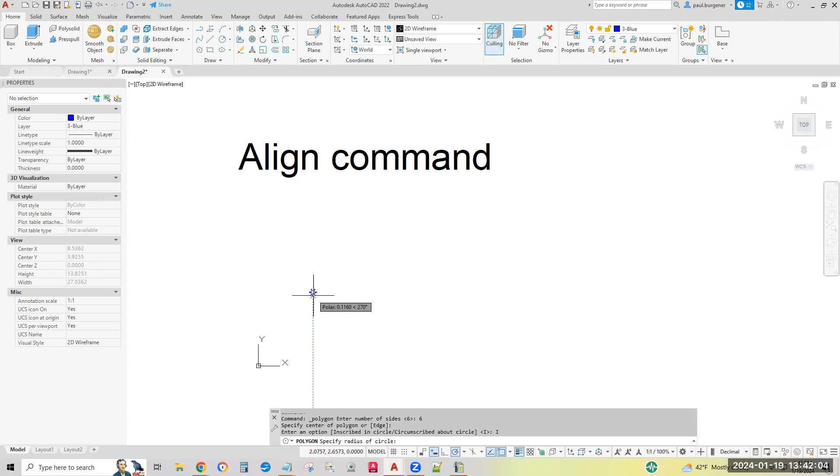Default is 4, but I've been practicing, so I'll make it 6 for a hexagon instead of a square. Pick a point - I'll pick around right about there. Inscribed or circumscribed - inscribed, either one will work. Now the radius, 2, enter.

And I got it on the wrong layer. Always something. Okay, set my current layer back to 0. You'll see why I've got layers in a second. There's my hexagon polygon that's extrudable or press-pullable.

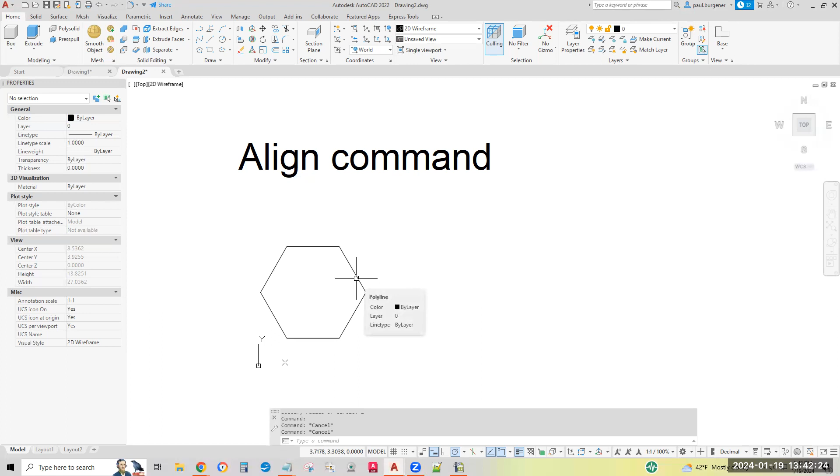Let me rotate a bit to get a kind of southwest isometric-ish view, not perfectly isometric, because I don't want points to line up and look like 6-legged spiders. Hit escape to get out of 3D free orbit. Notice I use 3D free orbit, not orbit - I think free orbit is more powerful, more capable than the old orbit.

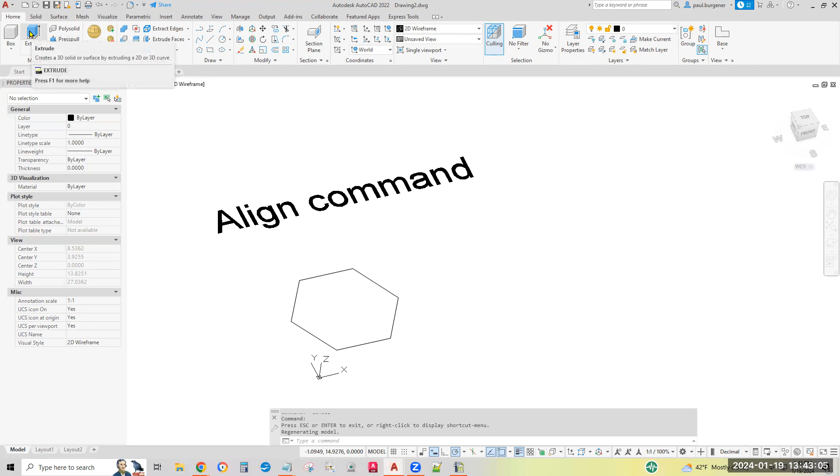Let's extrude this or press pull it. I showed you extrude in class number 2, intermediate AutoCAD. Let's demonstrate press pull. The hard part of press pull is you've got to have a clear shot at the surface you want to lift out or press down. Sometimes that's hard to get a clear shot without any confusion.

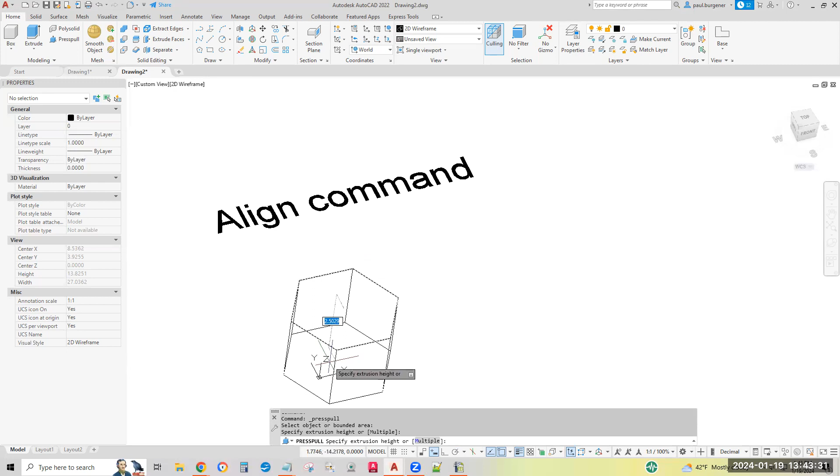This one has no confusion - I'll just click in this open area. Now it says specify the height. You've got to be sure you point in the correct direction. I want to go upward, so I'll go up the Z-axis and type 3, enter. There is my hexagon.

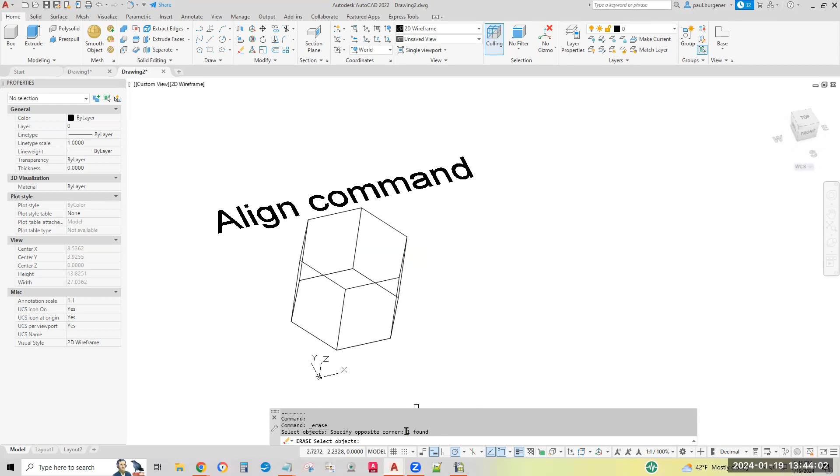Now the original polygon with 6 sides still lives there. I'm going to erase it so it doesn't cause confusion. I'll select it with a regular window. Got it, 1 was found. Enter. Now I'm going to need at least 6 copies of this.

I might make 7 for good measure. And I need 1 to kind of be the pedestal on which I'm going to make my new art sculpture - I'll show you that in a second. It's already made off the screen to the right.

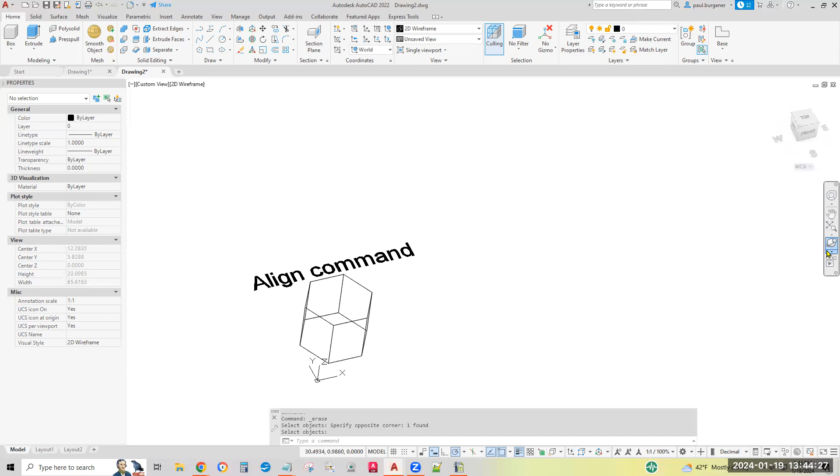So let's make copies of this hexagon. By the way, every point of this hexagon is on the XY plane. There, you rotate the view so you've got X and Y perfectly horizontal. And remember, ID enter - the ID command will tell you the X, Y, and Z coordinates. All these bottom points should be Z equals 0. Very easy to accidentally get things off the XY plane.

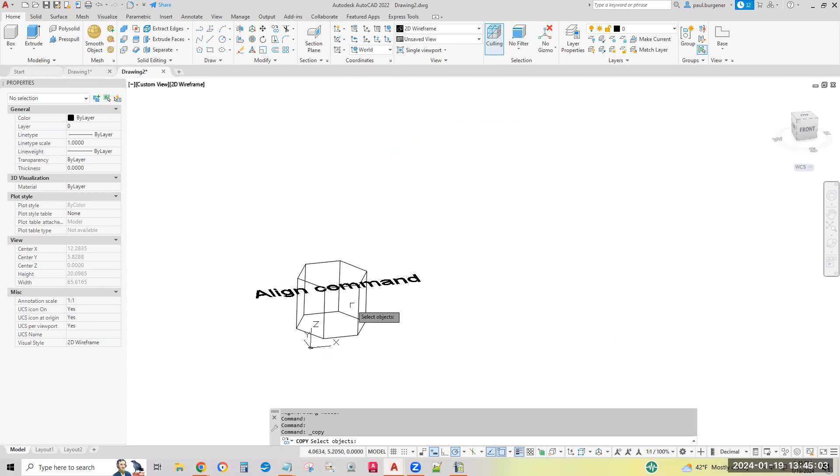So check frequently. Let's make copies of this hexagon. We'll go to copy. I'll select the hexagon, and I'll probably move them several times, but I want to get them so that I've got a clean shot at every endpoint.

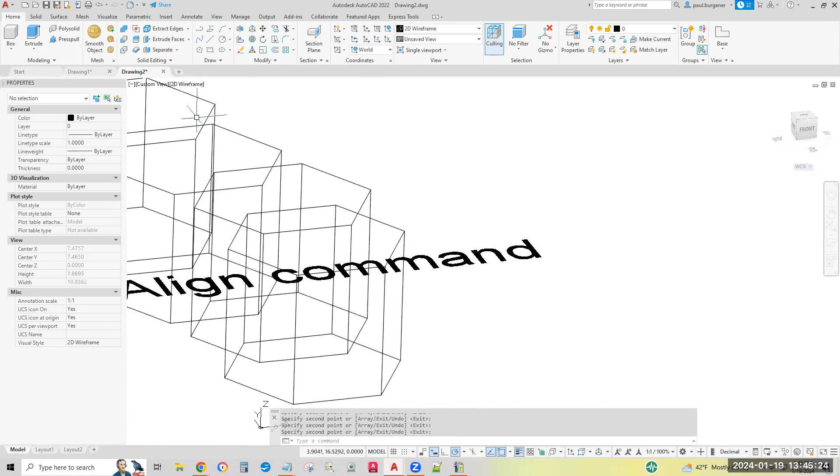There, and I think by zooming in I can home in on every endpoint - maybe not as easily as I wanted. There's the 5. Here's the statue.

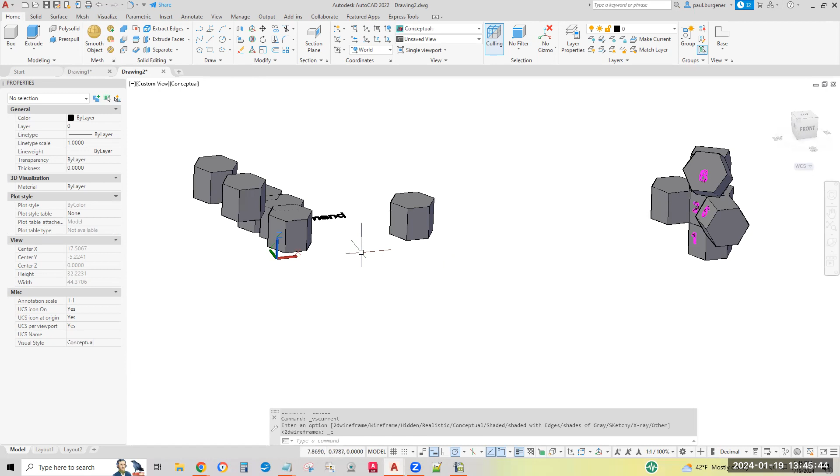Let me make the base for the statue. I'll copy this guy, we'll start it there. Let's go to conceptual. And there's where - why did that go wrong? Let's do a regen.

How did those get moved up? Well, that demonstrates my point. You can easily get things off of the XY coordinate. I'll just draw a line by picking two random points without polar tracking.

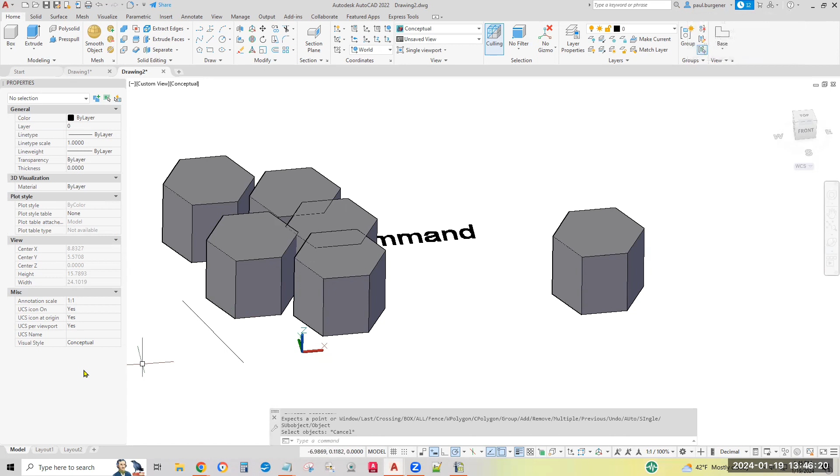I can move, enter for move, these two back down to the Z axis. E for erase, enter. Now let's rotate. And everything's on the Z axis, on the XY plane.

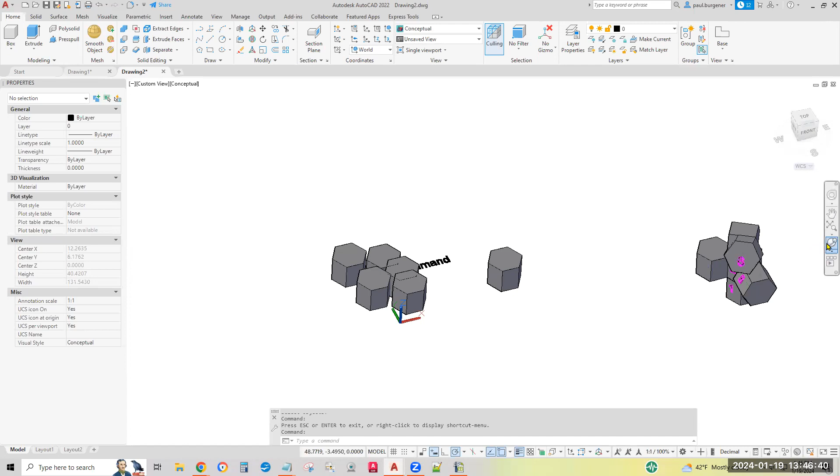I'll slide them around on the XY plane as necessary. This is the art sculpture we're building here. Let me get a better view so you can see all the objects at the same time.

This cube here, this hexagon, is shown in the completed art sculpture as hexagon number 1 at the bottom. We'll place one of these copies on top of it, being hexagon number 2 in the art sculpture. Another copy will hang off the side to be 3, 4 on top, 5 off the side, 6 kind of diagonally.

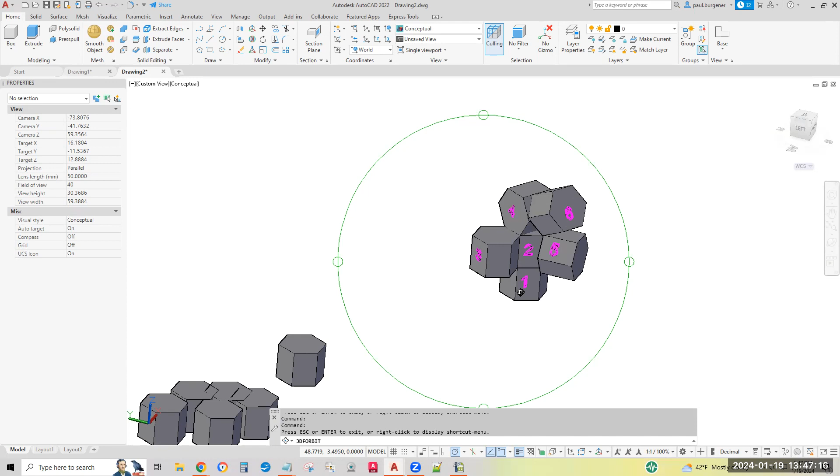So we're going to make this art sculpture, if you will, by aligning copies of the icon of the hexagon on top of that base I just drew. Let's zoom in.

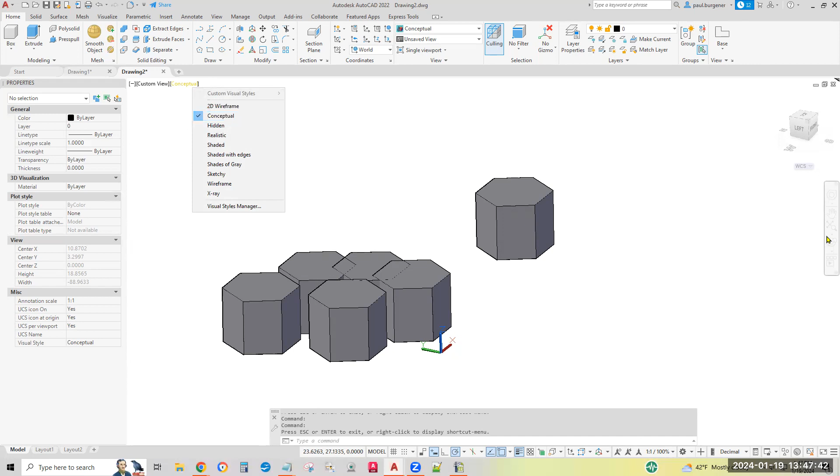Escape to lose 3D free viewing. I don't recommend orbit, or 3D free orbit, I should be saying. Let's go back to wireframe. I prefer free orbit instead of orbit. Unfortunately, orbit is the first on the flyout.

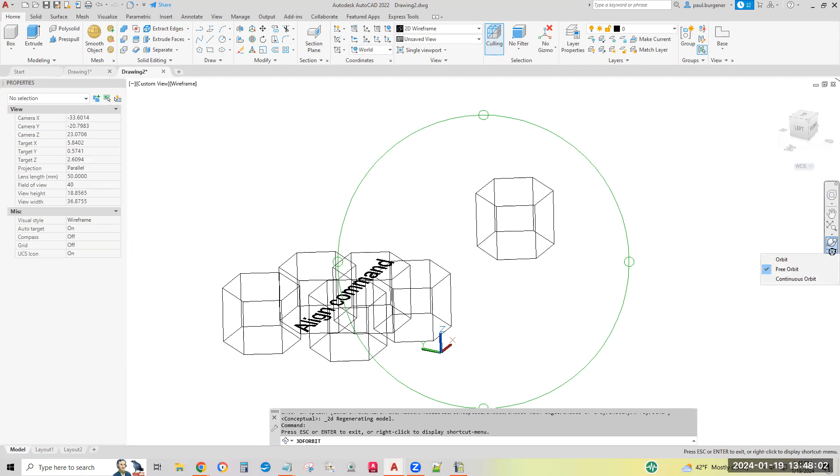So remember, the first time you use this icon, drop down the flyout to select. Come on, there we go. To select free orbit, more capable. I think it's worth getting used to.

All right, let's place a copy on top of this one. Well, obviously, since they're both angled the same, if we go down to top view, they're perfectly similar icons.

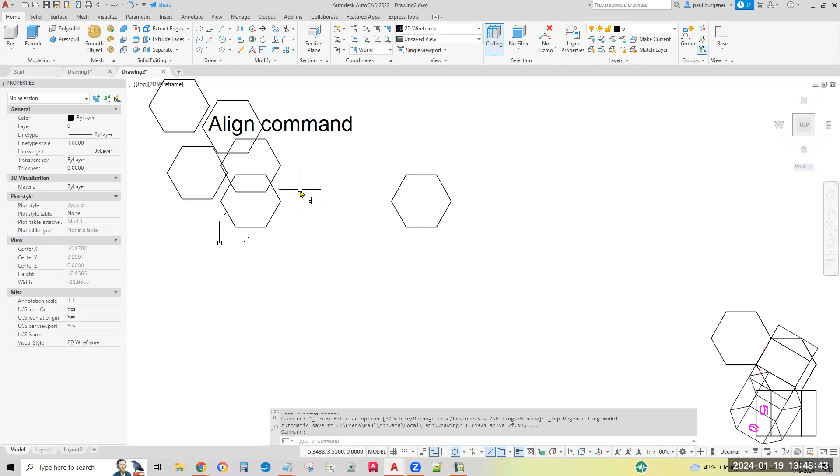I'll go zoom previous in a second. But all of these are perfectly lined up with all these. We just got to move one to there in the 3D view. And, Z enter, P enter for zoom previous.

So I'll start basically. I'm just going to align it so that this point here matches this point here, or is on there. Now, obviously, we could just move it, base point and destination point, but let me exercise a very, very simple use of the align command.

I'll draw the bungee cords I'm going to specify. Now, which point do you want on the bottom of this one, or for that matter, could be points on the top, and keep it simple. Well, let's keep this as simple as possible.

This point will touch there. This point will touch there. And the back corner will touch there. So it's going to move right on top. And this bottom hexagon will perfectly line up with this bottom hexagon.

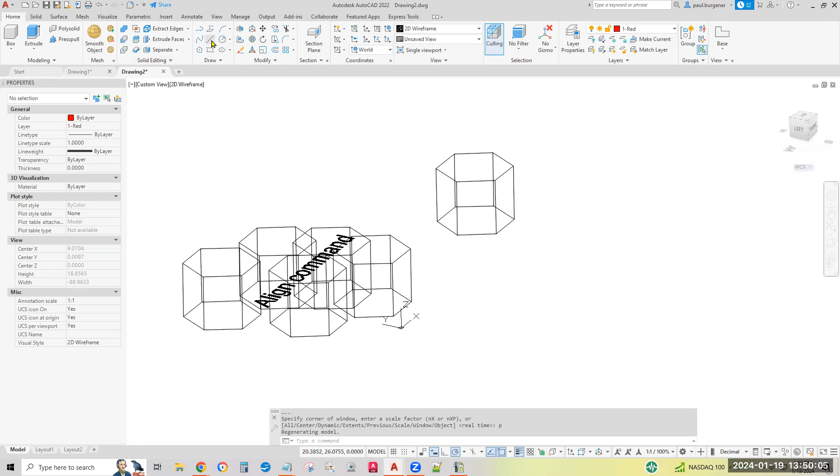Top hexagon. Let's draw the bungee cords, though. I've got them colored red, green, and blue to get you used to X, Y, and Z axes colors. Bungee cord number 1, the red one, I want to go from here to there.

Bungee cord number 1 is infinitely strong, so the first point of bungee cord number 1 will perfectly touch the second point. Go to bungee cord number 2.

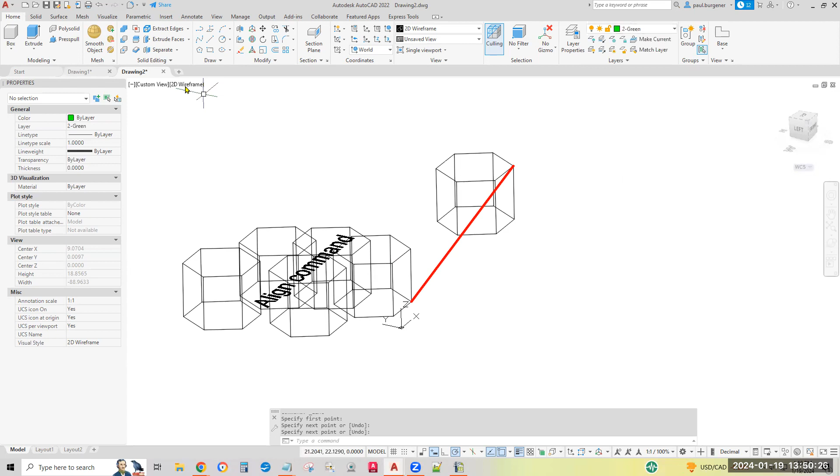Keep it simple, just there to there. Enter. And bungee cord number 3, blue, the very, very weakest of all, I want to go from that corner to that corner.

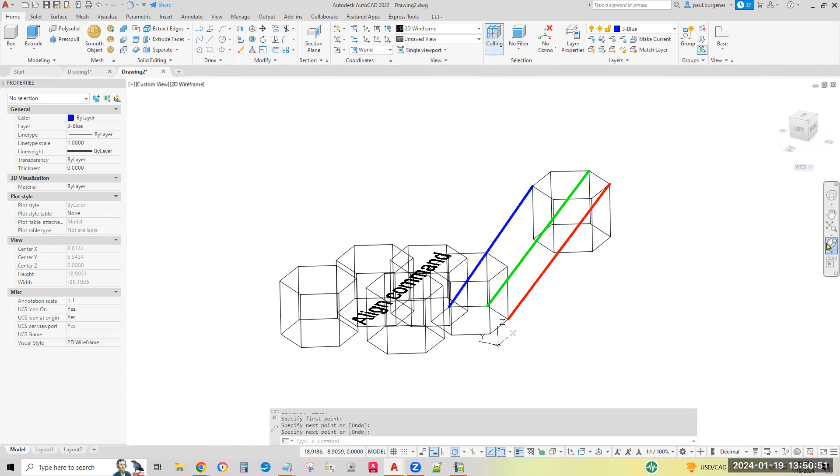A little 3D orbit. So as you can see, moving and using any of those 3 bungee cords will accomplish the same, but let's start very, very basic and then add complexity as we add more bungee cords or as we add more hexagons.

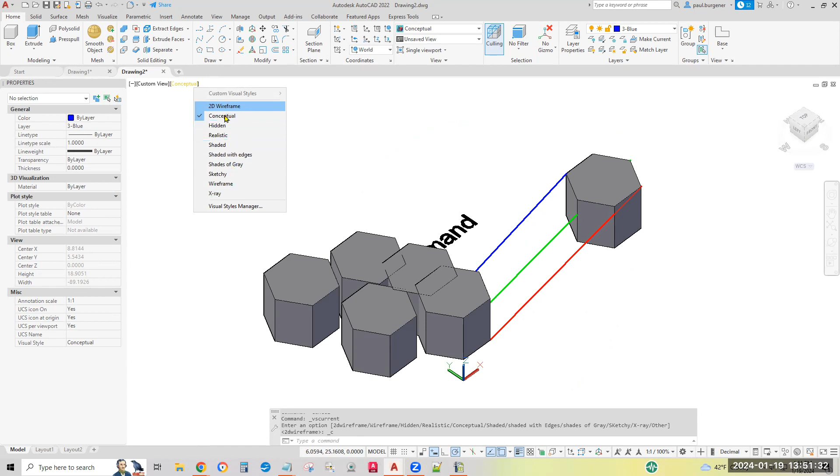Okay, 3D visual for good measure again. Go back to 2D. And by the way, X-ray has the advantages of both wireframe and conceptual, but for some reason it displays kind of blurry on my old cheap monitor. So I'm going to toggle back and forth rather than stay on X-ray.

Return to 2D wireframe. Let's launch the align command that's on the drop-down section of the modify panel of the home tab of the 3D modeling workspace here. Should have shown you that earlier.

Let's go to modify, align, select objects. Only select what you want to move and spin. Most of the time, it's just a single object. You could pick several if you want to move and align an assembly of objects together. Enter.

Next step is specify first source point. That's the hook on the align selected object of the first bungee cord. So that would be the first source point. Now it's asking for first destination point. That would be the opposite end of bungee cord number 1.

So it asks for second source point. That would be the bungee cord 2 hook on the aligning object. Second destination is the opposite hook of bungee cord number 2 on the stationary object. Again, this is kind of like a bungee cord in a suitcase or a duffel bag onto your luggage rack. Third is source there, third destination is there, and as soon as I click, it's going to align.

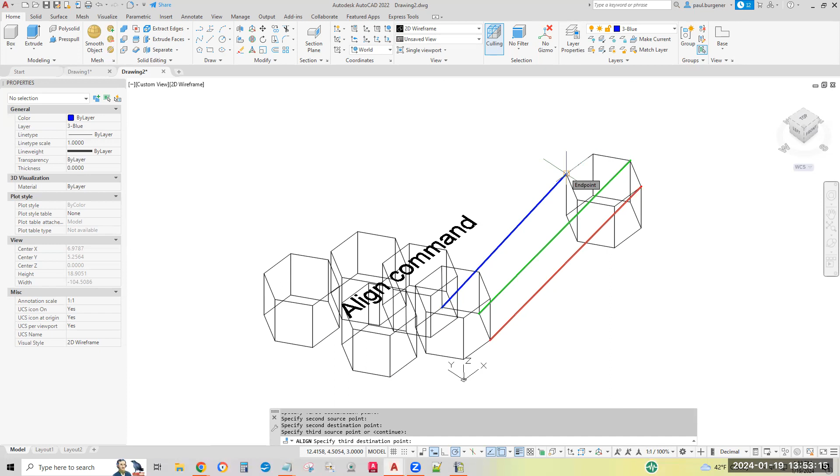Again, moving would have been far easier, but I just want to start very, very basic. Let me erase the 3 bungee cords.

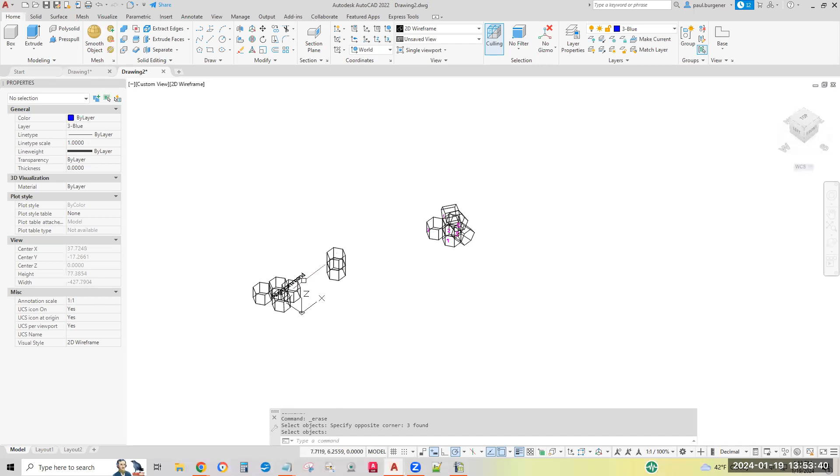Next one, we want to take a copy and hang it off of this side. Remember, here's the cube. We want to place number 3, so it's hanging off the side of number 2. So we want one hanging off of this side.

Now, similarly, we can copy it using this as a base point and that as a destination point. But let's make it a little bit harder. Instead of using this side to align with this side, which could be done with the move command, let's select this side to align with this side, or glue onto this side.

So it'll, in addition to moving, it's going to rotate, I believe, 30 degrees, if I remember my trigonometry.

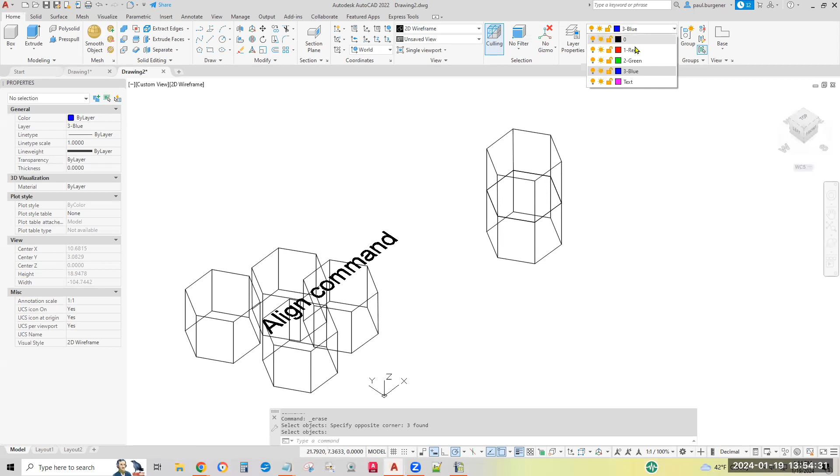Let's draw the 3 bungee cords again for good practice. Bungee cord number 1 is red. We want bungee cord number 1 to make those 2 points touch. Bungee cord number 1 is infinitely strong. It'll shrink down to 0.

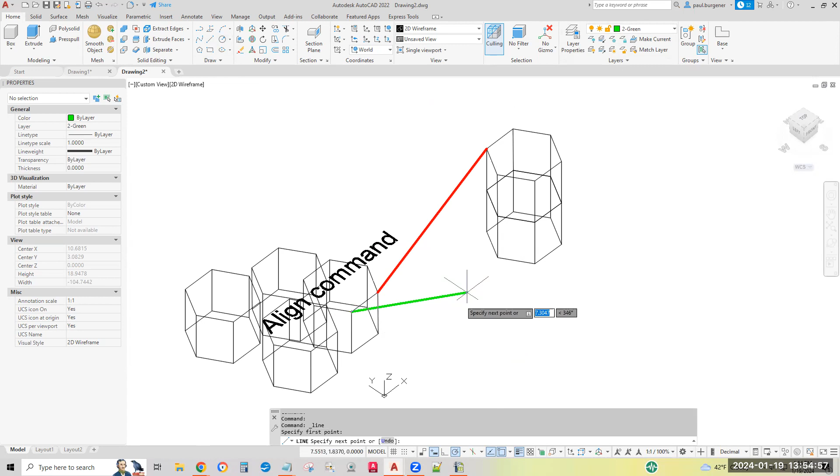Let's go to bungee cord. You don't have to make these layers, but again, start basic. Bungee cord number 2, we want that point to get as close as possible to this point. Bungee cord number 2 is weaker than bungee cord number 1.

Go to bungee cord number 3, line. Bungee cord number 3 is the weakest of all of them. The best hook point would be here, but it could be the midpoint, it could be there, it could be there. You know, just any point below on hexagon number 1 on that surface, down the z-axis.

Let's see. Okay, we pick corner, so let's keep it simple. We'll pick this corner. As soon as I click, it spins and moves. Ah, sorry, I'm still drawing regular lines.

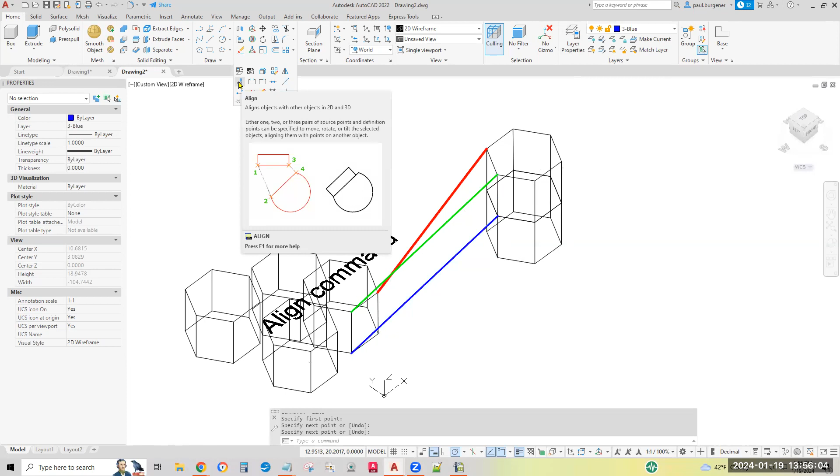Let's use those lines as guidance for the align command. AL enter, just type it in. We'll select what we want to move and spin and hit enter.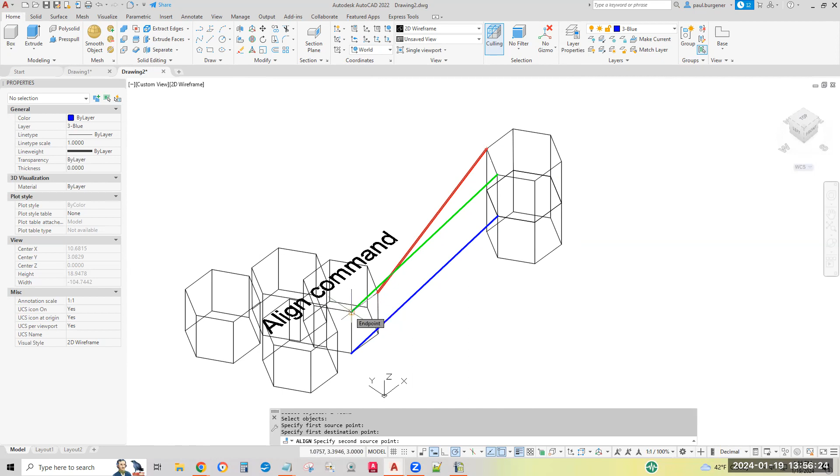First source point, that's the red bungee cord. There's first source, there's first destination. Asking for second source, that's the green bungee cord. Second source, second destination. Third source, third destination, and it moves and spins.

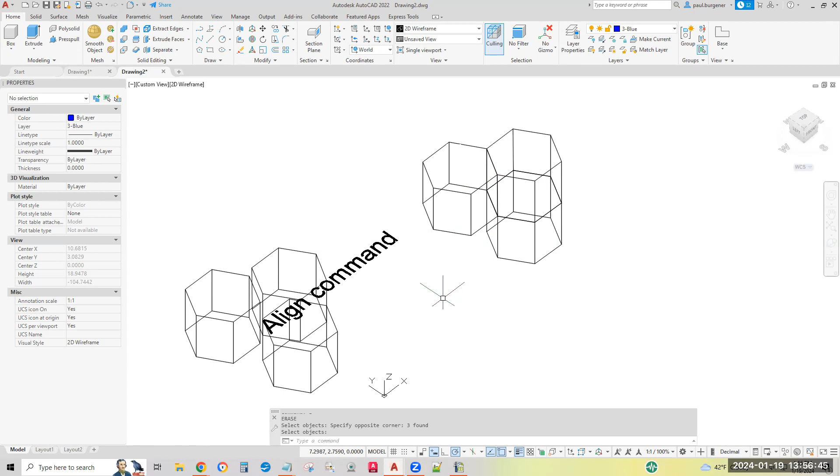Again, we could have gotten the same result by moving it, but we rotated it in addition to moving it using the align command.

What's the next one? 1, 2, 3, 4 is on top. Conceptual. Number 4 is on top of number 2, but the hexagon of hockey puck number 4 is on a vertical plane, not horizontal.

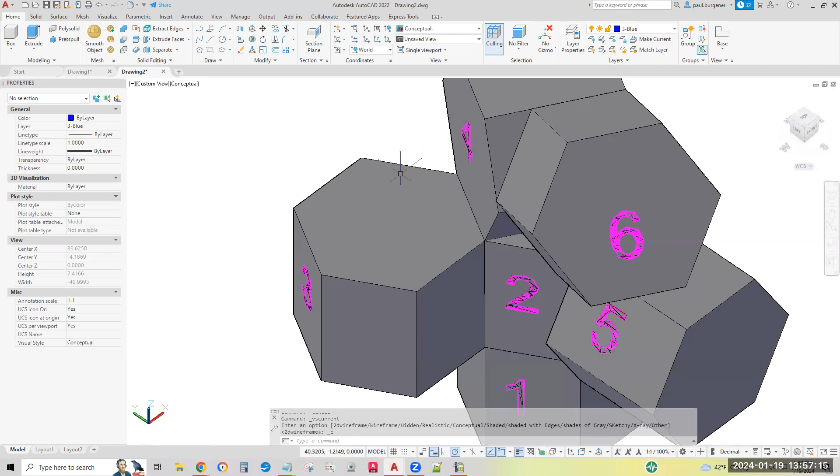Okay, let's go back to 2D wireframe. Go back here. Which one do we want to move and rotate? Let's pick the bottom one as usual.

Okay, which rectangular surface do we want to lay flat on this hexagonal surface? One might be a little more intuitive than the other. Let's pick this one here. We want this rectangle to lay flat on this hexagon so that, say, these bottom 2 points coincide with these 2 points.

Okay. Probably could do it with these 2 points, but it's a little bit harder to imagine. Let's go to our bungee cords again. First bungee cord will go from here to there.

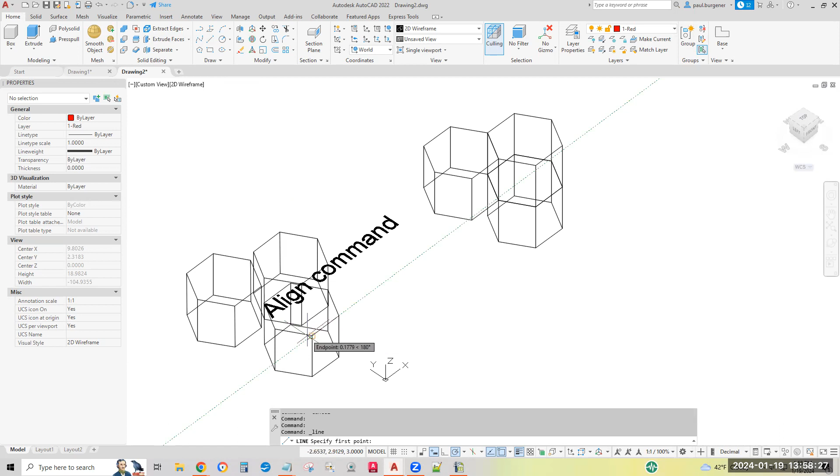Second bungee cord will go from, line command, there to there. Okay. However, we got to kind of flip and spin the hexagon hockey puck as it aligns.

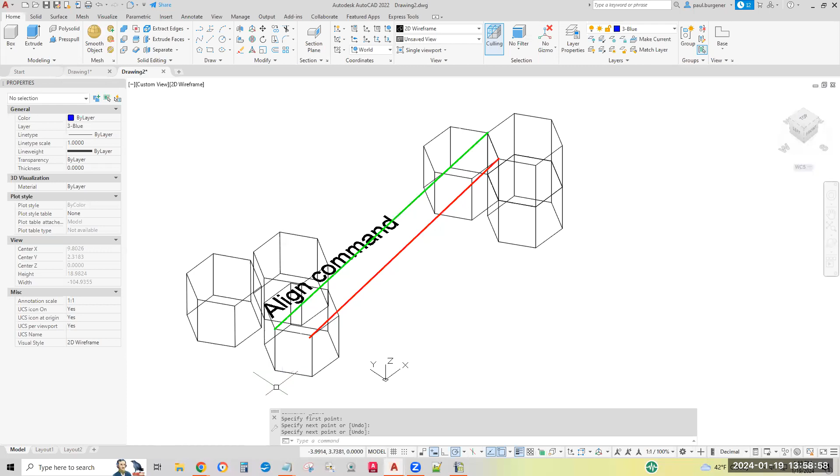So the wrong one. Bungee cord number 3 source point should be hooked in there. Go as close as possible to here. Could be there. Bungee cord number 3 is weakest, so it's flexible in your selection of points. We'll make it the obvious one.

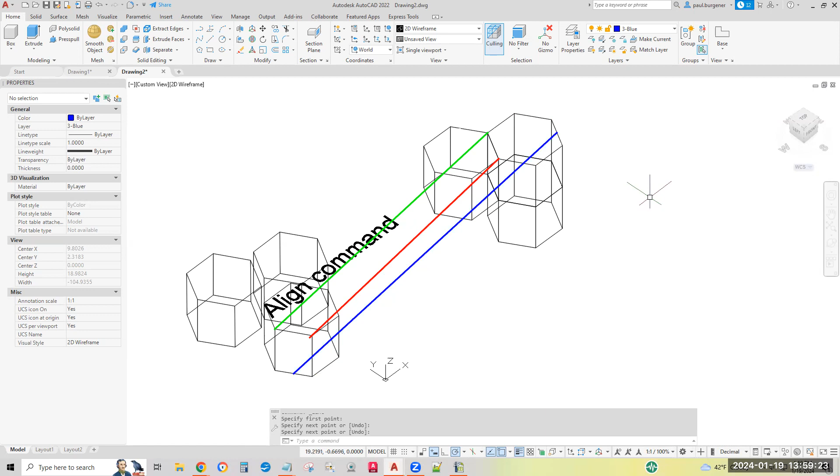Imagine what we're doing: rotate. It's going to kind of spin, flip, and move with the align command.

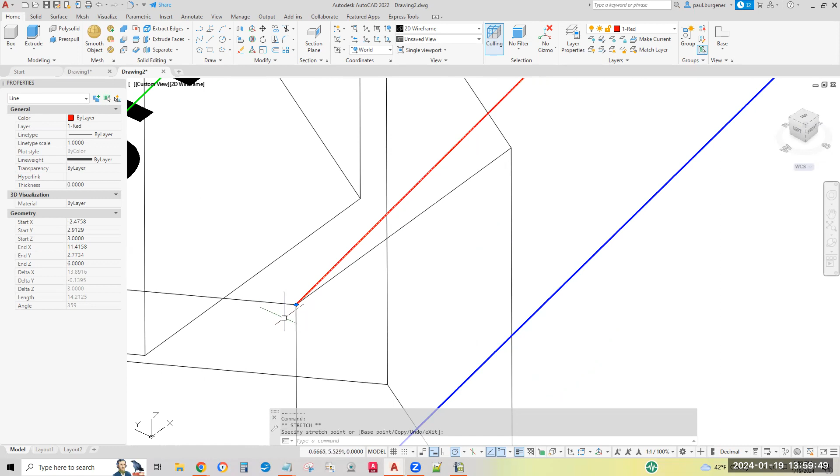Try to leave them where I got clean shots at O-snaps. Now, what happened there? I'm at a loss on why it did no snap. Maybe it was out, slightly outside. There.

Okay, let's go to modify, pull down, drop down, align, select what we want to spin, rotate, move with the align command, enter. Red one is bungee cord number 1.

Source point is there. Destination of bungee cord number 1 is there. Second source point, green, so that would be there. Second destination point is there. Third bungee cord source point is there, and the third destination point on bungee cord number 3 is there.

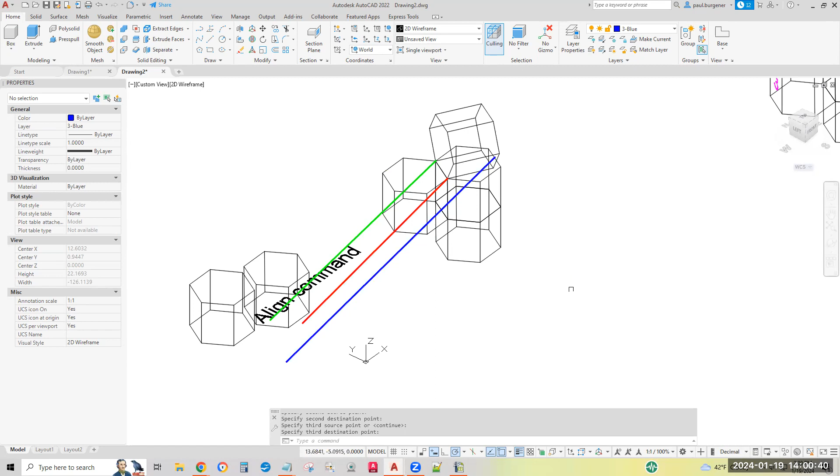And as soon as I click, it'll do its thing. Did its thing. Let's lose the guidelines. Let's change the conceptual.

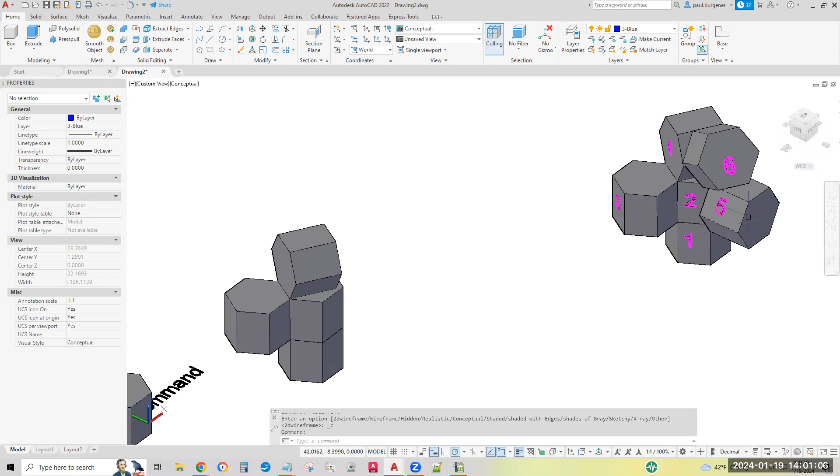So far, 1, 2, 3, 4 is the same as 1, 2, 3, 4. 5 is hanging off the edge. Okay, so we want one of the hexagon shapes of a remaining hockey puck to glue to this surface, so the 2 corners hang from these 2 points.

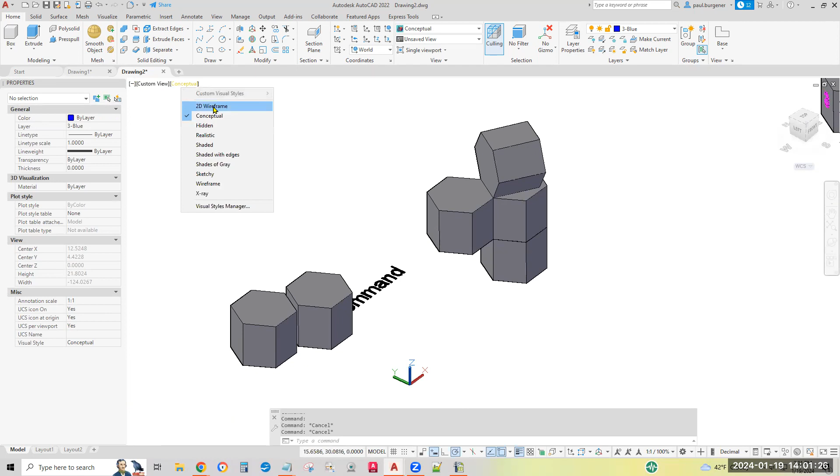Okay, let's return to 2D wireframe. Do I need to draw the guidelines still? Red, green, blue for 1, 2, 3 bungee cords. Eventually, you stop needing them.

Let's maybe watch the previous in this video to get an idea of going straight to the align command.

Now, which hexagon surface of this puck do we want to glue to this surface? Top or bottom? Flip a coin, let's say top. I'm going to glue this hexagon to this rectangle so that 2 corner points are at the top of the rectangle. Which 2 corner points?

Pick a point. Let's make it complicated. This back 2 corner points will hang from the top of the rectangle. Okay, let's go straight to the align command.

I'll select what I want to spin, rotate, and move. Enter. Source point 1, that'll be one of the 2 top points. Let's hang it from there to there.

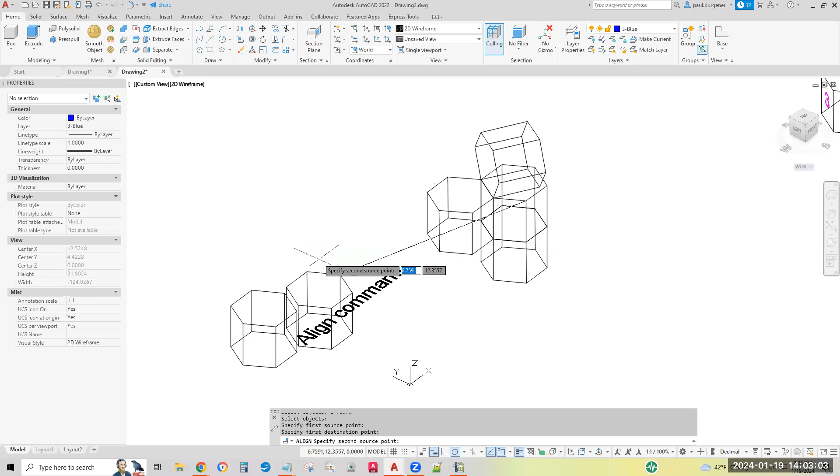Okay, visualize what it's going to be, and you'll see that, yep, those 2 points should coincide. Second source point should be as close as possible. Remember, bungee cord 2 is weaker than bungee cord number 1. As a matter of fact, that midpoint will work, but this end point is most intuitive.

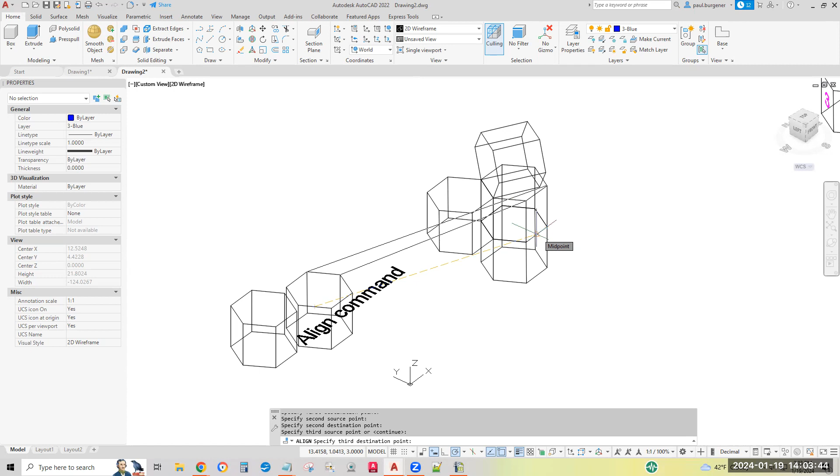Now, the hard part. Where do we pick number 3 and where do we want it to go? Well, midpoint here and midpoint at the bottom of the hockey puck number 2 is a good choice. So it'll flip, spin, and move. I hope. Click, and it did as we expected.

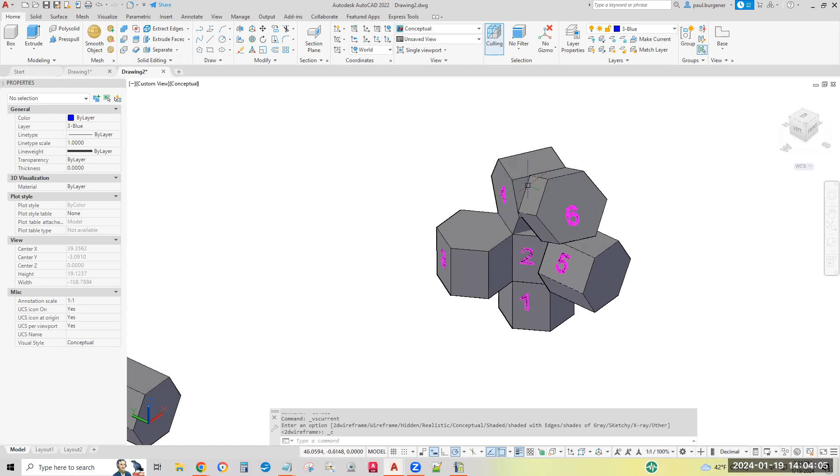Zoom out. 3D conceptual. Yep, 1, 2, 3, 4, and 5 are like 1, 2, 3, 4, and 5. The next one is 6, similar to 5, but we're hanging it on a diagonal surface instead of a vertical surface.

We can do it. Change the visual style to 2D wireframe. I won't draw the red, green, blue lines again. We'll go straight to align. Pick what's going to move, rotate, and spin. Enter.

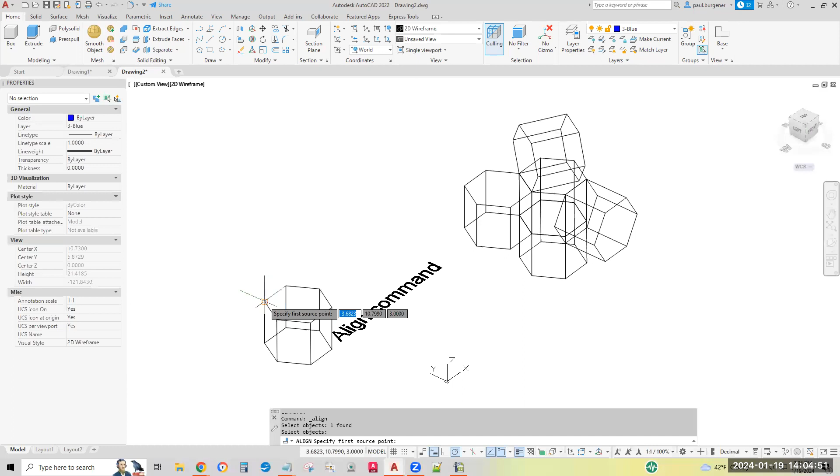First source point. Well, which side, which rectangle, which 2 points of this hockey puck do we hang on this sharp edge here? Okay, let's pick, say, this point, and double check. Okay, we want that point to be glued to there.

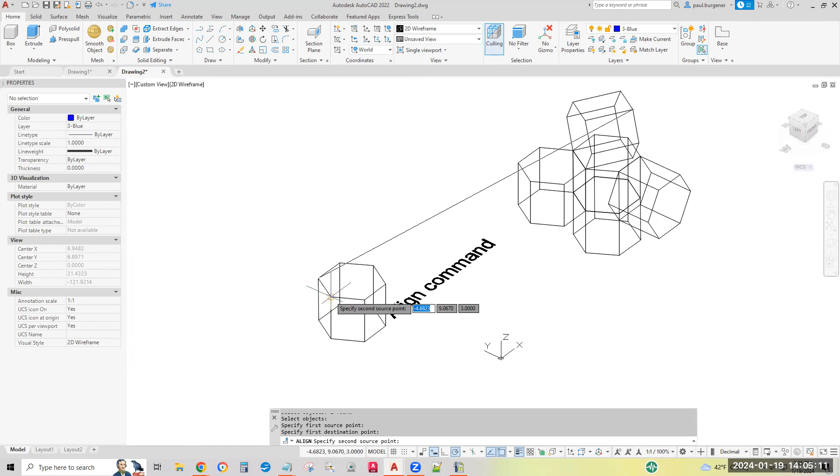We want that point to be as close as possible to there. It'll really fall short between there and the midpoint. So bungee cord number 2, slightly weaker, will go to those 2 endpoints.

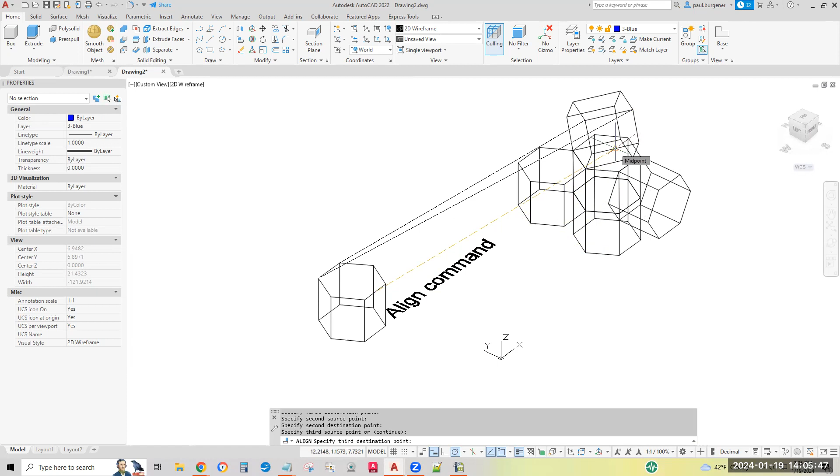Now to control the pivoting, we want the midpoint of this edge, could be either endpoint, to be as close as possible to the midpoint of this or either end. Did exactly what we wanted.

Move our art piece. Careful to pick 2 points on the XY axis. Try to get them so they're side by side.

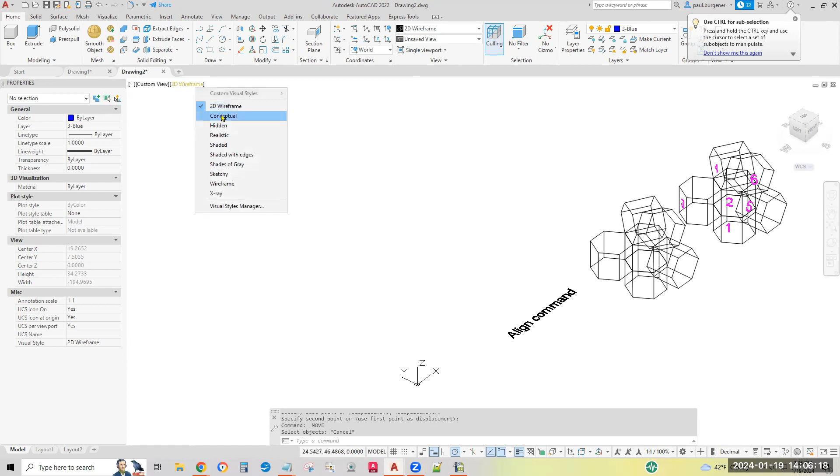Conceptual. 3D free orbit, again that's the second one on the fly out. Zoom in. We've replicated the 3D model.

Okay, we'll soon do an exercise of making a sawhorse. It's going to be the next step in complexity with the align command.